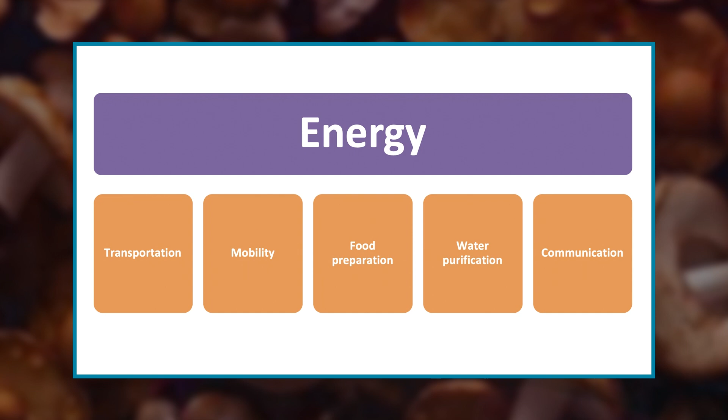Welcome dear students. Today we are going to talk about a very important topic, that is energy crisis and need for green energy. Energy is required for several practical functions, including transportation, mobility, food preparation, water purification, and communication.

Global population and economic expansion have contributed to increased energy use over time. The efficiency of energy end-use services has gradually improved due to technological advancements and energy efficiency legislation. Nevertheless, this improvement has not always been adequate to offset the increase in demand for energy services, such as the production and consumption of commodities.

In addition to the current energy crisis, the predominant source of carbon dioxide emissions, the primary greenhouse gas responsible for global warming, is the widespread use of fossil fuels to produce energy. Therefore, scholars and decision makers generally agree that carbon neutrality by the middle of the century and other climate targets outlined in the Paris Agreement can only be achieved by gradually reducing global energy demands to a sustainable level as well as using negative emission technologies.

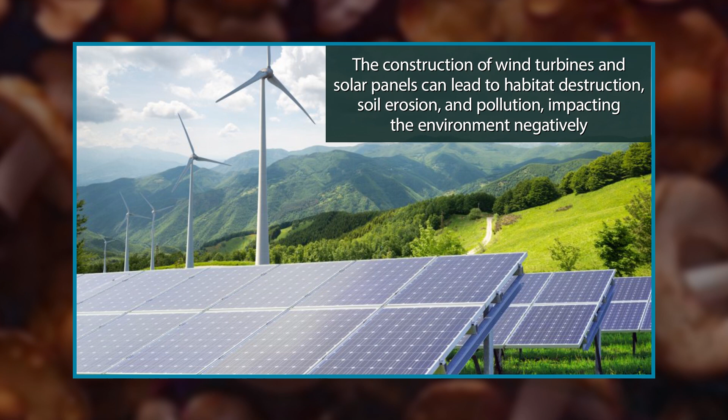Moreover, the extraction and transportation of fossil fuels has also led to environmental degradation. For instance, oil spills have destroyed marine life and ecosystems, while coal mining has resulted in soil erosion, deforestation, and air pollution. The environmental impact of the energy crisis is not limited to fossil fuels, but also extends to renewable energy sources. The construction of wind turbines and solar panels can lead to habitat destruction, soil erosion, and pollution, impacting the environment negatively.

The energy crisis has had significant social impacts, particularly in developing countries. The lack of access to energy, particularly electricity, has reduced many people's quality of life. For instance, lack of electricity limits access to modern healthcare, education, and communication, hindering social and economic development. Moreover, the energy crisis has also led to social inequality, with marginalized communities often having limited access to energy resources.

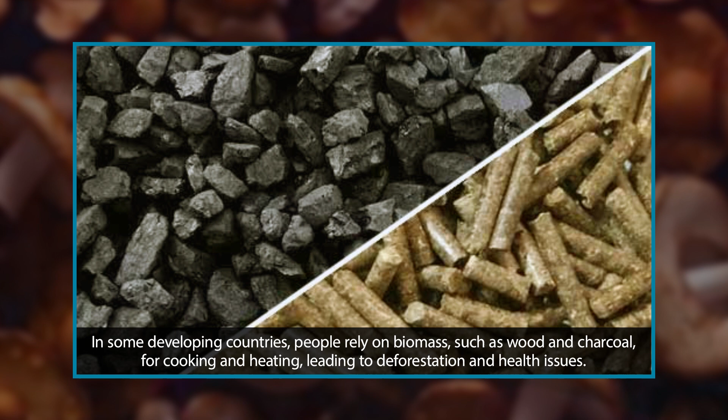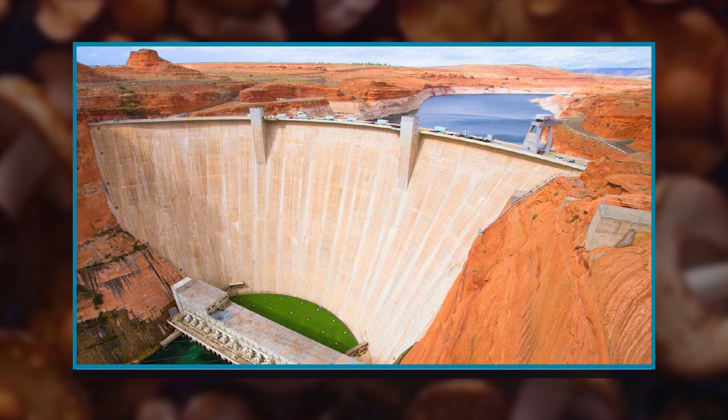In some developing countries, people rely on biomass such as wood and charcoal for cooking and heating, leading to deforestation and health issues. The energy crisis has also led to the displacement of communities, particularly in areas with high energy demand. For instance, the construction of hydroelectric dams has led to the displacement of indigenous communities in many parts of the world. In Africa, people living without electricity increased by more than 15 million between 2019 and 2021, reversing almost all the gains made over the previous years.

Dear students, now let us talk about green solutions. Several green alternative solutions are available for oil or natural gas based home heating systems that can help reduce carbon emissions and improve energy sustainability. Air and ground source heat pumps are more efficient and sustainable than traditional heating systems. At the same time, biomass boilers burn wood pellets, chips, or logs to provide heat, which can be a sustainable alternative to fossil fuels. However, they require regular maintenance and a larger storage space for energy.

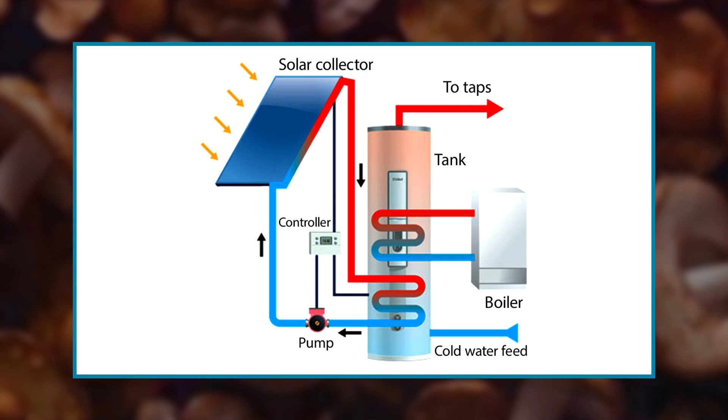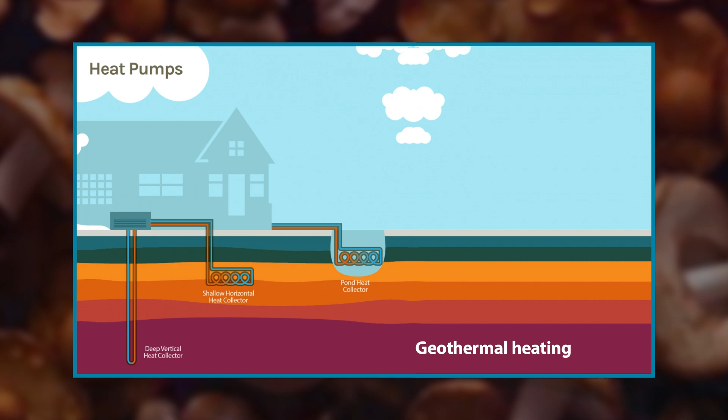In addition, solar thermal panels use energy from the sun to heat water or air for space heating, which can be a renewable and sustainable alternative to traditional heating systems. Infrared heating panels use infrared radiation to heat objects in the room, providing more targeted and efficient heating with little maintenance. Geothermal heating, which uses the Earth's natural heat to provide heating and cooling, is also a sustainable and efficient alternative to traditional heating systems. Consultation with a professional is recommended to determine the most suitable green heating solution based on the location, climate, size of the home, and available renewable energy sources.

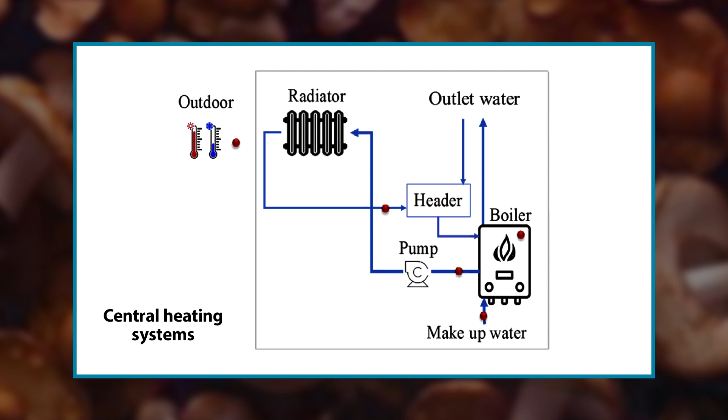Now let's talk about biomass boilers and stoves. Burning biomass instead of oil and gas in boilers has successfully combated the greenhouse effect and is considered the most feasible energy option for reducing greenhouse gas emissions. Central heating systems such as stoves and boilers can utilize a forced air or hydronic distribution system with radiant or convective heat emitters to generate heat in one location and distribute it throughout a home. Popular biomass fuels for boilers include pellet straw, energy crops, herbaceous fuels, or a mixture of these. Additionally, pellet fuels with larger surface areas are more easily burned.

Biomass boilers have the potential to promote energy independence, lower heating costs, and reduce greenhouse gas emissions. The simplicity of operation and reduced power needs for hot water heating were key advantages, as it was found that replacing traditional fossil fuel and natural gas boilers with biomass boilers reduces carbon dioxide emissions. In addition to being a low carbon heating technology, wood pellet heating can be more cost effective for those with limited budgets. They can be purchased in small quantities, easing the burden on those with limited incomes.

Biomass-based low-carbon heating systems can significantly reduce greenhouse gas emissions from residential buildings, as biomass is essentially carbon neutral, resulting in a low carbon footprint. In a heating system that uses a mixture of 20% straw and 80% coal, increasing the proportion of straw in the mixture reduces nitrous oxide and sulfur dioxide emissions, demonstrating the carbon reduction effects of biomass. Thus, biomass boiler heating can be an effective means of reducing greenhouse gas emissions while having the potential to cause pollution from other gases.

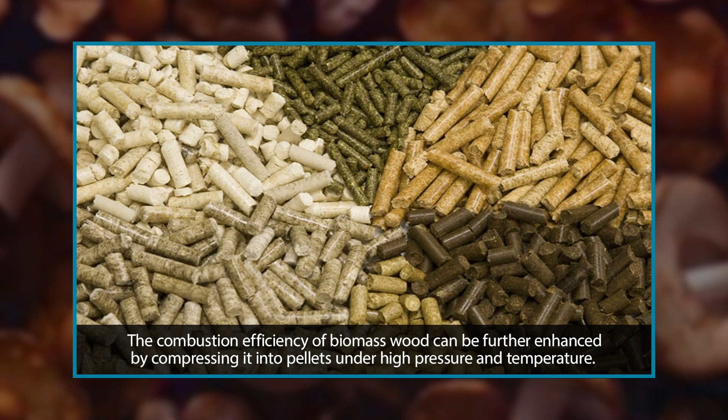The combustion efficiency of biomass wood can be further enhanced by compressing it into pellets under high pressure and temperature.

Now let us talk about hybrid heat pumps. Heat pump systems which extract heat from the air, water or earth for space and water heating require electricity to operate. Heat pump technology can significantly outperform traditional boiler-based household space heating methods.

In fact, advancements in heat pump technology and renewable energy sources could substantially reduce greenhouse gas emissions in the residential sector. The benefits of heat pumps can be enhanced if the electricity used to run them has low or no carbon emissions. It has been found that hybrid heat pump water heaters can reduce hot water usage by 50 to 70% compared to natural gas water heaters, resulting in deep decarbonization and offering multiple benefits for decarbonizing home heating.

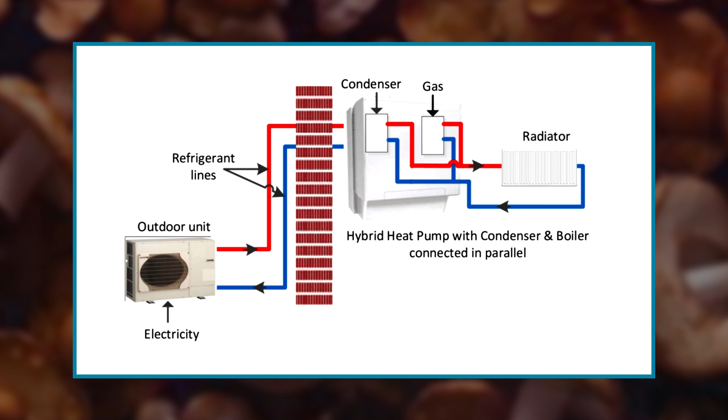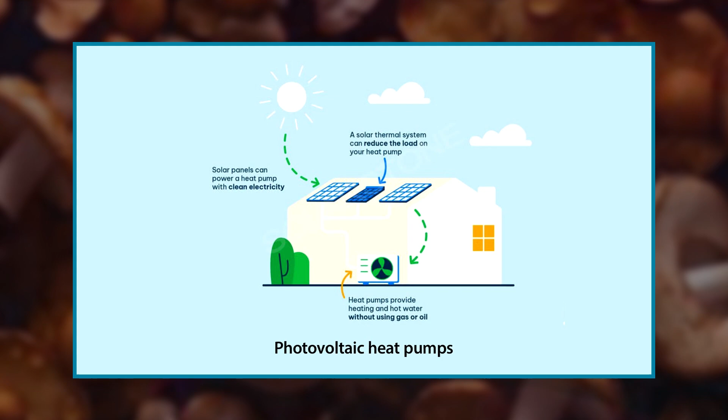Similarly, research on photovoltaic heat pumps which generate electricity and hot water for households in the UK region reduced annual electricity consumption by 60% and lowered the overall cost compared to traditional heating systems. Moreover, this approach reduces carbon dioxide emissions by 910 kg per year per household.

Increasing the number of photovoltaic panels from 12 to 24 in an intermittent photovoltaic heat pump can further reduce annual carbon emissions by 700 kg per year, making it a practical and sustainable greenhouse gas reduction solution for the UK. The hybrid heat pump systems offer significant improvements in heating efficiency.

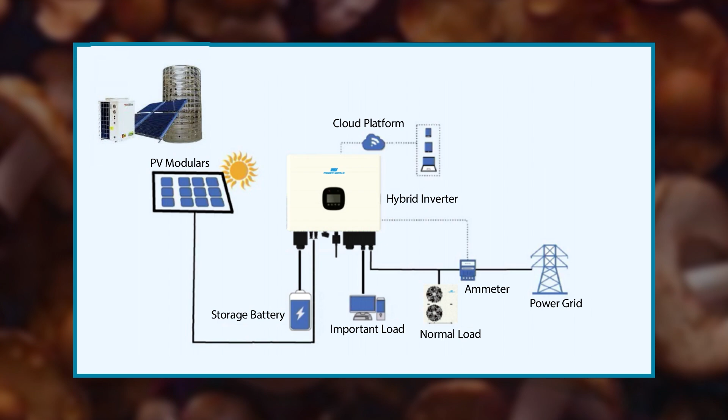A hybrid photovoltaic heat pump system can increase total power generation by 3.5% with a 6.5% increase in photovoltaic panel power, a 100-fold increase in heating water capacity and improved overall heating performance. The heat pump can adjust the proportion of different energy operations based on weather conditions to ensure that it can still output more heat energy during extreme weather conditions.

The hybrid heat pumps present a more effective solution for home heating, creating an opportunity to achieve substantial decarbonization and cost savings within the building industry. By incorporating renewable energy sources, hybrid heat pumps can minimize carbon dioxide emissions and improve the efficiency of traditional heat pumps for heating purposes, reducing energy consumption. This decrease in energy consumption subsequently leads to reduced combustion costs, highlighting the economic feasibility of hybrid heat pumps.

However, the drawbacks of low capacity, high installation and maintenance expenses, and significant cooling requirements must also be considered.

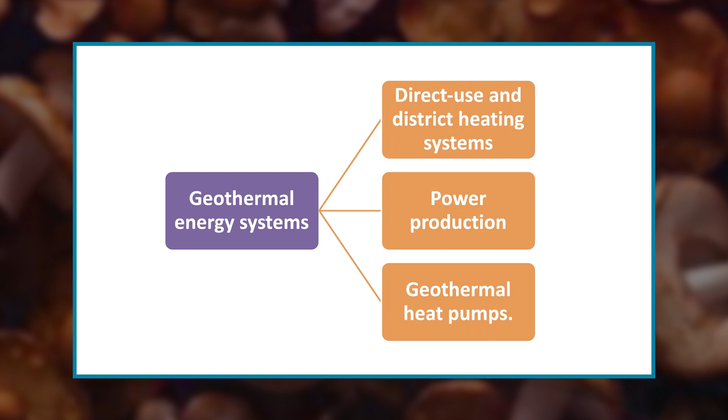Now let us talk about geothermal heating. Geothermal energy is a dependable, robust and sustainable energy source generated by the Earth's internal heat. It allows users to heat their homes autonomously without relying on conventional energy providers. Geothermal energy systems can be categorized into three primary groups: direct use and district heating systems, power production, and geothermal heat pumps.

Additionally, geothermal systems can provide active and free cooling to fulfill cooling requirements. Furthermore, economies of scale can be achieved with larger geothermal installations in the network, resulting in higher efficiency and lower unit energy costs for geothermal heating and cooling. Combining geothermal energy with waste incineration and natural gas boilers, replacing 50% of the natural gas consumption, results in a significant decrease of 60% in greenhouse gas emissions.

The low environmental impact of geothermal energy further increases the installed capacity. It improves the efficiency of heat production, making it a desirable low-carbon option for the building industry in Geneva. Additionally, incorporating renewable energy in the heating system can improve the carbon reduction performance of geothermal energy, as seen in the case of photovoltaic geothermal heating. The combination of renewable energy in the heating system can further enhance the geothermal carbon reduction performance.

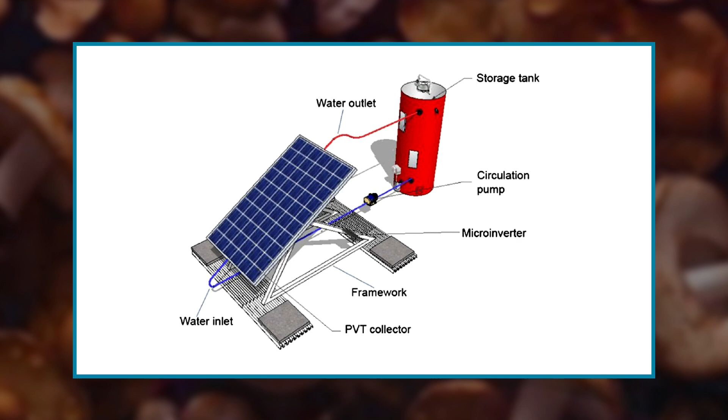Now let us talk about solar photovoltaic systems. Electric boilers are cost effective for low cost electricity. An electric boiler connected to a solar system through an alternating current is called a photovoltaic assisted electric boiler. To ensure optimal performance, the electric boiler is sized to match the photovoltaic system's peak alternating current power output.

Combining photovoltaic, hydrogen and wind energy could generate electricity for fuel cell heating, with excess electricity fed into an electric boiler. This approach has resulted in a 4.5% increase in renewable energy share and a 48% reduction in carbon emissions.

Integrating solar cogeneration with electric boilers can reduce the waste of excess electrical energy generated by photovoltaics by channeling it to electric boilers for conversion into thermal energy. Electric boilers offer a way to use excess electricity to meet thermal loads, while photovoltaics provide a renewable energy source for significant carbon and cost savings.

Large photovoltaic systems can make the design of buildings with electric boilers more cost effective. Using an electric boiler in a renewable power system that includes photovoltaics leads to a 29% reduction in annualized costs and a 7% reduction in energy costs, as well as a significant decrease in annual carbon dioxide emission equivalent to 21,990 kgs per year. Now students, let us talk about solar thermal heating.

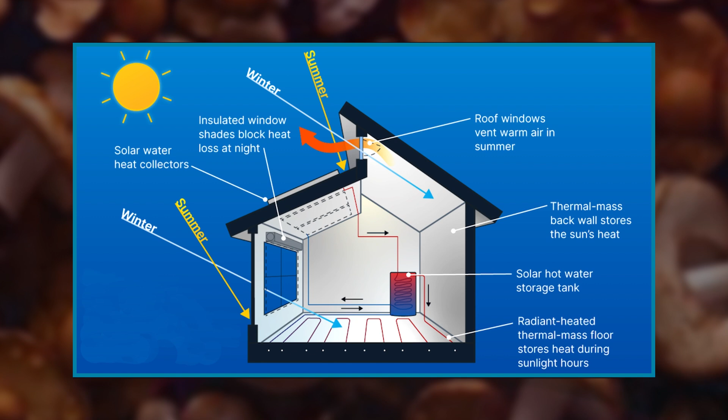Solar heating is a promising option for low energy homes, as renewable solar energy systems can provide various necessities such as power, hot water, space heating, and even cooling. The underlying principles behind solar systems, particularly solar heaters, are simple yet effective. These include converting the sun's electromagnetic photons into thermal energy and transmitting it to water for use in homes or industrial activities. Solar heating offers several benefits, including lower fuel consumption, reduced pollution, and minimal maintenance requirements.

Solar heating has been found to have a higher impact on carbon saving during summer, that is 86.8%, due to higher solar ratio. In contrast, the efficiency of solar heating systems is positively correlated with temperature, although the collector effect is lower in winter. Installing solar thermal energy systems can significantly reduce carbon emissions and contribute to a low carbon economy. Solar thermal integration can reduce the overall use of biomass and thus decrease dependence on this highly demanded energy

source in future. In temperate areas, utilizing solar thermal energy as part of a heating system for homes results in a 25% reduction in electrical energy consumption and increased thermal comfort. Combining solar thermal with other renewable technologies can further improve performance, as demonstrated by the integration of solar heating systems with air heating exchangers, which effectively reduce carbon emissions and energy demand during heating. Now let us talk about compressed natural gas and methane.

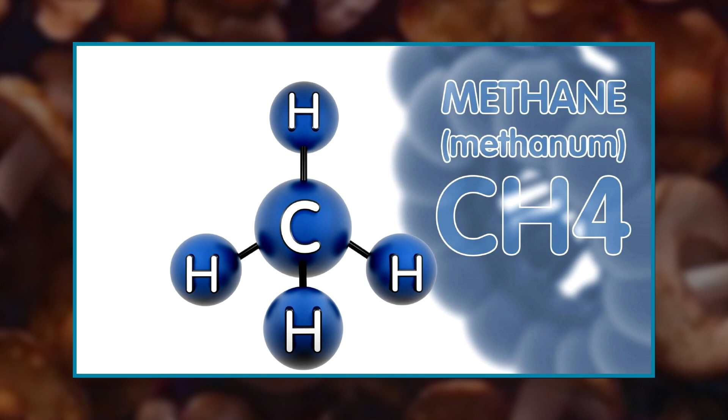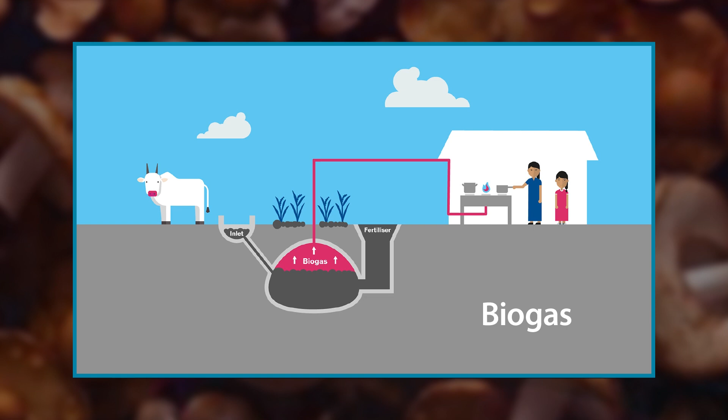Compressing landfill gas by cooling and compressing the biogas or landfill gas with water produces a mixture of natural gas hydrate that is transported for further processing. Biomethane can also be compressed to the necessary pressure and injected into the natural gas pipeline network. Natural gas with a high octane rating possesses desirable characteristics such as clean combustion, high calorific value, and abundant reserves. It also has a high hydrogen to carbon ratio and broad combustion limits. Therefore, the compression and utilization of landfill gas are highly competitive with methane alone.

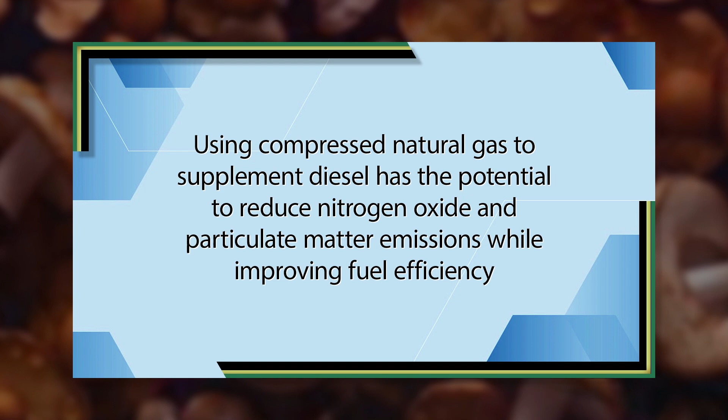Compared to gasoline, compressed natural gas emits 10 to 13% less carbon dioxide and 15 to 30% less carbon monoxide, while having approximately 25% lower combustion level than gasoline, which enhances fuel combustion performance. Using compressed natural gas to supplement diesel has the potential to reduce nitrogen oxide and particulate matter emissions while improving fuel efficiency. By adding compressed natural gas, conventional fuel combustion power can be increased. For instance, adding 56% compressed natural gas to diesel fuel can increase the maximum power rating by 30%.

Methane from biomass sources can meet all or part of compressed natural gas demand, fueling internal combustion engines at higher compression ratios to pursue higher efficiencies. Furthermore, compressing gas streams rich in methane to 70 bar for transportation via pipelines can recover up to 86.4% of the carbon in biomass in the form of methane. Therefore, compressed natural gas can be utilized in generators that use conventional fuels, offering both economic advantages in terms of fuel savings and environmental advantages in terms of carbon savings.

However, the combustion of compressed natural gas may lead to incomplete combustion due to slow combustion rates, resulting in the emission of unused methane into the atmosphere, which could potentially cause a 20-fold increase in global warming potential. In summary, using compressed natural gas and methane improves fuel combustion efficiency, making it economically viable while reducing greenhouse gas emissions and promoting cleaner energy.